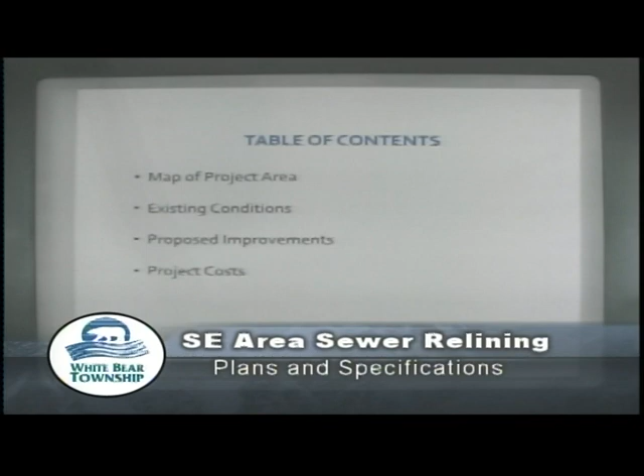We did receive a lot of good positive feedback about the activities that we are proposing to do. We completed that feasibility report, brought that back to the town board, and they accepted that. That's where we are at the next step here, where we're holding the public hearing.

For the project that will improve those old sanitary sewer lines that we have out in this area. So just kind of going through the areas that we'll be talking about, we'll go through the project area, the existing conditions of the system, what the actual improvements are to the sanitary sewer, and then the costs associated with that.

But just as a visual for the project, we have Bellaire Avenue running along the west portion. We have White Bear Lake, we have the township limits, and County Road F cuts right through the middle of it, with half the project being north and half being on the south side. This is all White Bear Township properties out here.

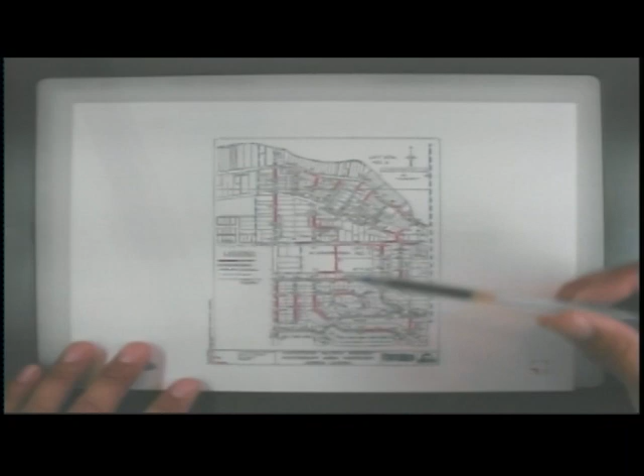The colored areas on the map show the existing sanitary sewer pipes that we have out there. The pipe sizes for the main line are both 8-inch vitrified clay pipe and 10-inch.

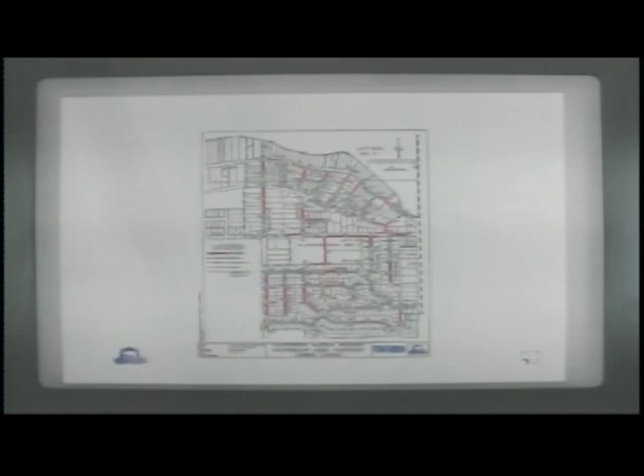So these are old sections of pipe that were installed, which was the common practice back about 50 years ago. They are short length pipe, about 3 feet long. They have held up very well, but we have gotten to a point where, as public works, as we go through and do our annual cleaning areas, we find more and more cracked pipes.

More and more areas that are starting to fail. Just in the last several months, a year or so, we've had a couple of emergency corrections.

I think some of you probably have witnessed them along Bellaire Avenue, where the pipes actually failed. We had to call a contractor out, dig down to correct those pipes because it stopped the flow through the pipes, and fix that. When you are reacting to those situations, that's a very costly process, not a very efficient way to correct the pipe.

And we'll show you just what some of those issues have been. So this is just looking down through a camera that we have run through the sanitary sewer main line. And again, this is where the main line typically runs down the middle of the right-of-way, down the middle of the street for the most part.

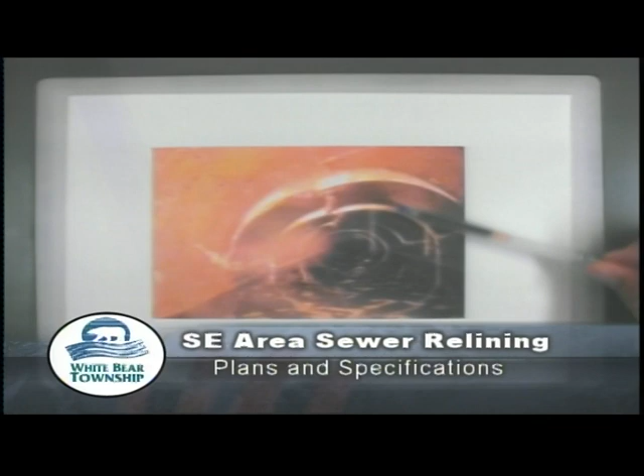What you can see through this camera here is the water line. This is flowing just below half full, but you can start to see here where the separations with the joints from the pipe, and you start getting roots, other growth that is coming in that pipe. I have some more pictures of this.

Here you can see with a time of lower flow, the water is down at this portion. You also start getting buildup in those joints, and here's a significant one.

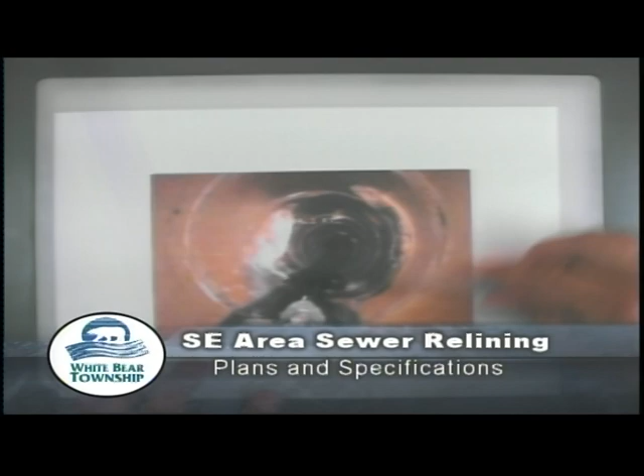So when the township is out doing their inspections, we do televising at intervals, we do flushing of the system, but at a certain point, the flushing activity where we run water through there to flush the pipe out, it can only do so much, and areas like this have to have further equipment work. We've had it where once we get certain buildups, we have to hire contractors to go down and they actually grind out these activities that are building up in the system.

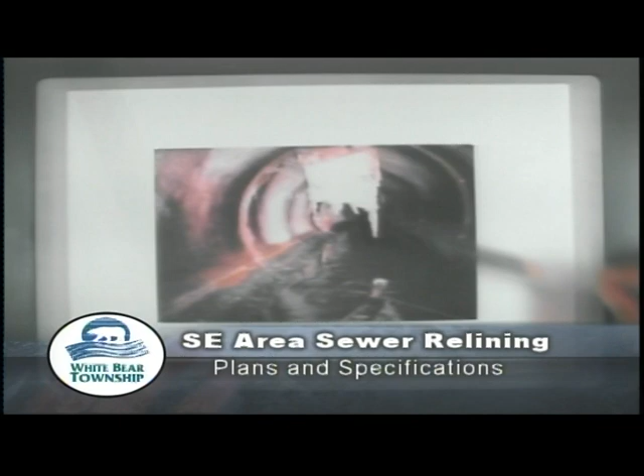Here is another picture showing a significant area, how it's coming down from the top of the pipe. And as the flows build up in the pipe, these become restrictions, and it also becomes where other material in the pipes starts to hang up.

We also have this where the buildup occurs at the bottom of the pipe. If the joints have gaps or other debris starts to build up there, you can see how it blocks the water flow. So all of these items cause issues.

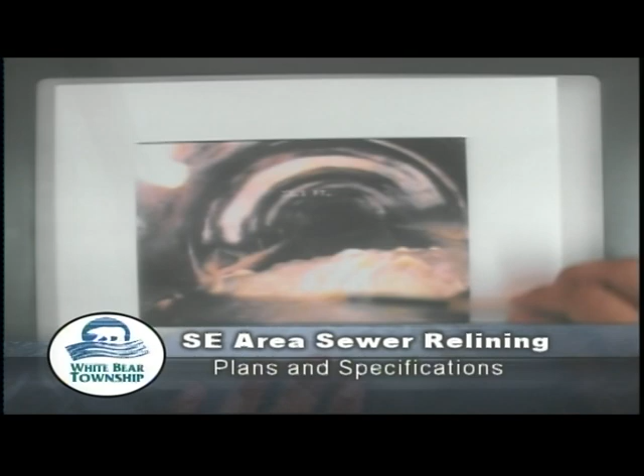As long as we can keep the flow going, you don't notice it at your homes, but these are the type of activities that can increase over a short period of time, cause a substantial backup, and then as the pipe is plugged, that water backs up, and that is where it can back up the services and up into your homes.

Also, if you have a pipe failure, as we had the last couple of years here, it completely shuts off the pipe, and then you just have a short period of time to correct that because you only have so much storage in that pipe.

Overall, the pipe has served its life. We have poor conditions that exist out there, and now it's time that we need to replace this or improve this, or we're going to continue to have problems, and it's going to be an expensive process fixing piece after piece. It's also a red alarm type of situation where you have to get out and fix it now.

Also, our annual maintenance - we want to be able to go out and flush the lines, and the small amount of buildup you can take care of. But as the issue worsens in these pipes, the amount of labor it takes just to do the normal routine cleaning expands in time. So it becomes a costly process to the township.

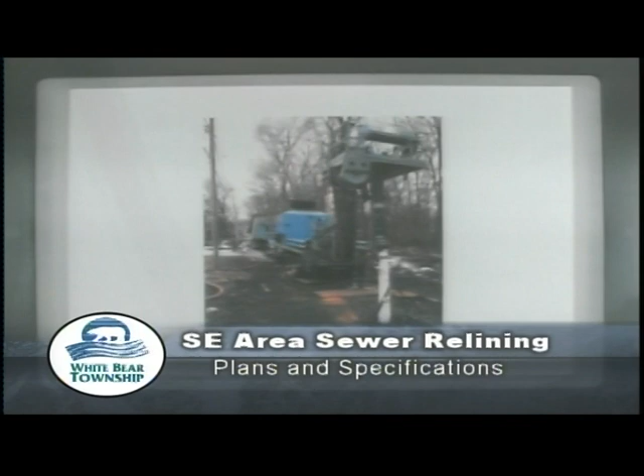As you can see here, the sanitary sewer system is made up of the main line of pipe and then your services to your homes. What we have for access to that main line is, every up to 400 feet is our standard distance, or as you go around bends in the roads or bends for the service area, we put in what you call a manhole - a 4-foot diameter structure that is a vertical shaft down to that sanitary pipe.

But I might try to change the focus a little bit to make it easier to see. Zoom in. So you can play with that to make it a little easier.

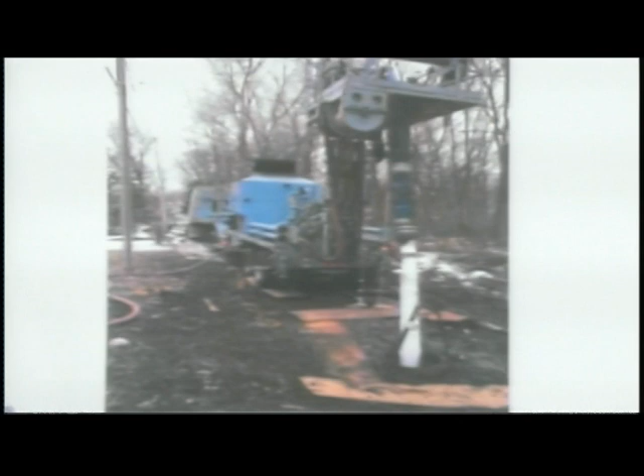All right, thanks. And so what you see here is the manhole structure - basically a 4-foot access down to that pipe that runs horizontally. The system, one other component, is a gravity flow system, so that's what we're using - Mother Nature is what's sending the water downstream.

What we're doing here, through this lining process, is we are able to take, say if we have 400 feet between these manholes, we're taking this 400-foot long sock and we're forcing it through that whole length of pipe.

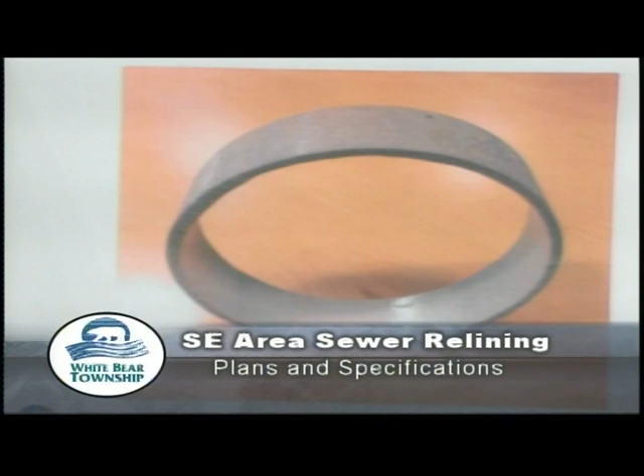So now, I'll show you - go to here. This is a sock that we are running, a continuous sock, the whole length from manhole to manhole. So it's flexible when it goes in. Once we have it to both ends, then we heat it up and cure it, and now this becomes a rigid structure, a hard, round membrane that is inside of that pipe.

Very little of the pipe diameter is used up with this - you can see how thin this is. So you start off by running this down through the whole length, and you end up with this product going from manhole to manhole. So now what was something full of cracks or joints or different issues, we have one continuous flowing system once again.

And unless we had to dig up for some major issue, you won't even see any construction between those activities. When this process is done, you can see there will be large equipment sitting out in the roadways accessing these manholes, but that whole 400-foot length, there won't be any disruption.

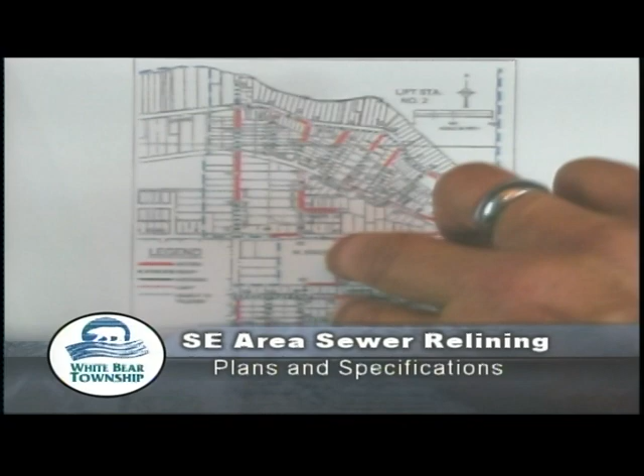Overall, to do almost 30,000 feet of pipe, if you use 600, 700, 800 feet a day, we're talking 40 to 50 days of work. But your impact is really just going to be when they're in the street that you're by. One day they'll be doing work on this stretch, the next day they'll be moving throughout the area. So really, you probably will only see a couple days throughout the whole process of activity.

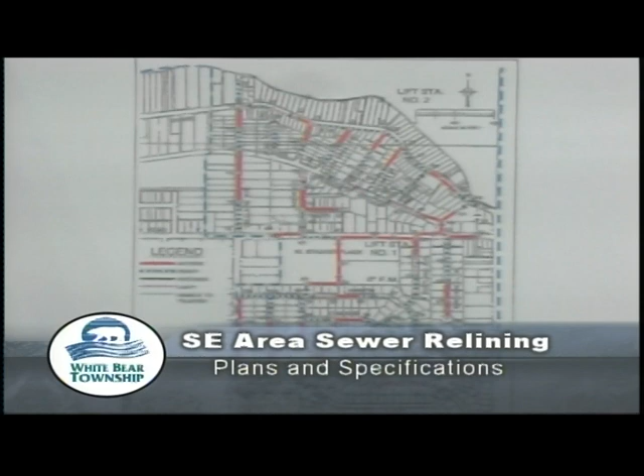You'll see up front when the contractor comes out to do the televising of the system, to really get the details of the pipe and what work we'll have to do, and get all the service dimensions to where everybody's houses are connected. There'll be some manhole work, and some areas where we'll have to dig up the street to fix the pipe, but the vast majority of the activity will be that piece of equipment moving from street to street doing the actual lining activity. So even though this is a lot of days of activity, your inconvenience will be a very short period of that.

So now we get into, what does 29,000 feet of pipe cost? We are looking at a $1,713,000 project. That is the entire process of putting together the plans and specs, going through construction. We have the assessments for this activity, the township costs associated with that, which will be broken down further.

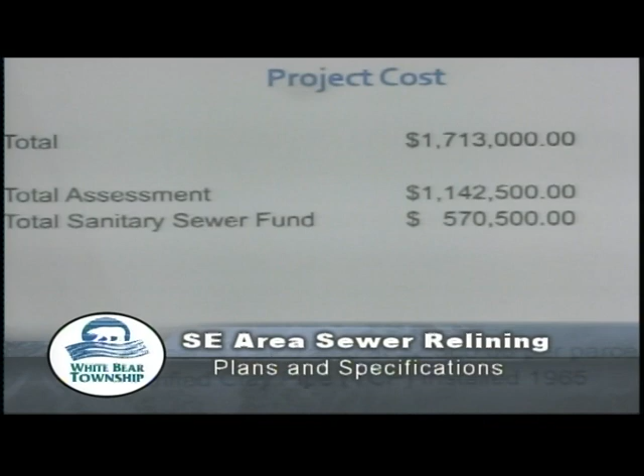We just did some lining work on the south side of White Bear Lake a couple years ago. I'm not sure if you've seen that activity or not. And again, just as a side note, all this pipe in this area was put together in 1965.

So here's another breakdown. Again, residentials are everybody based on 1 unit per parcel per house, that's the $2,500. So that's how we come up with the $1,130,000 of that assessment. We also have the commercial lots: the Bel Air Auto, the Bel Air School, the dental clinic.

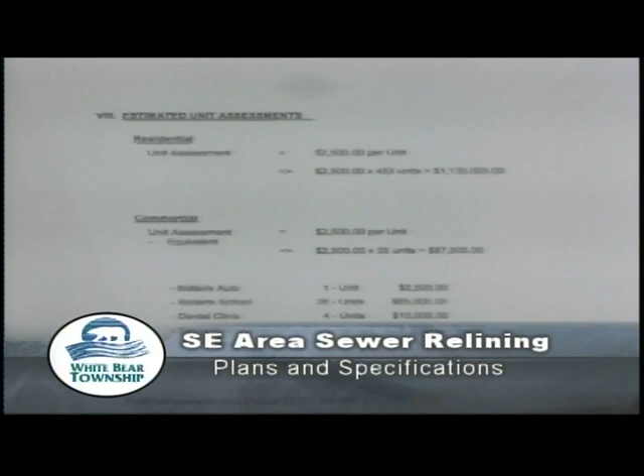The South Shore Trinity Church, and the storage building. Based on the size of those and what we call residential equivalent units, they get the same $2,500 per unit rate, but they are rated per what they would be equivalent to a residential unit. So this Bel Air Auto is equal to 1 residential unit, but the Bel Air School, through all their uses, is actually basically 26 times what a residential unit would use, and therefore their assessment is based on that. Same thing with the dental clinic, the church, and the storage building.

So this project, if it were to go forward, the time frame would be to go through plans and specifications. We prepare those, we go out for bids, have contractors give us numbers. Hopefully by the end of the year, either in December or January, we would be awarding a contract to a contractor. They will have basically the majority of 2017 to do that work. They could be starting in January, February, March, but they would need to be done by the fall. So a year from now, the project would be getting wrapped up.

The time period is set so we can give the contractors enough time to fit this into their schedule and so the township can receive the best prices for that work. Because this is a lining project and we're basically down 10, 12, 15, 20 feet in the ground, this work can be done with cold temperatures in the winter. Our last sewer work along the South Shore, we actually did it when there was ice on the lake, because that became a good access to the tough-to-get-to sanitary sewer that was running along the shoreline.

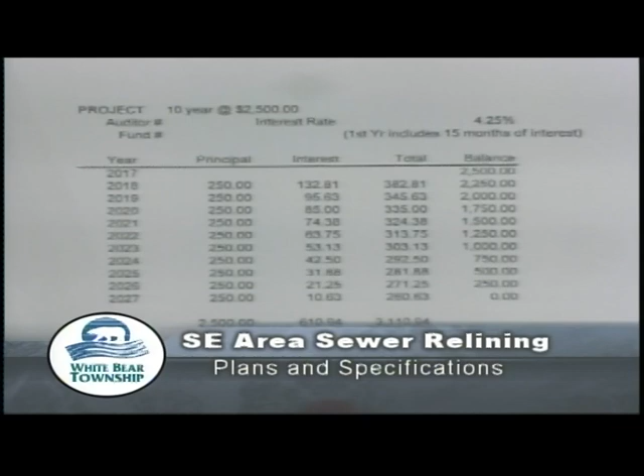At this point, projecting a year from now, we anticipate this on the high side, but whatever that rate becomes, using a 4.25% interest rate, if you took that $2,500 with your principal payments over the 10 years plus interest, you'd be looking at starting up in the high 300s down to almost $250 per year. These would be placed on your property taxes. So if you did that plan, you'd be looking at a final payment 10 years from now, having paid a total of $3,110.94. So the township offers this 10-year payback plan.

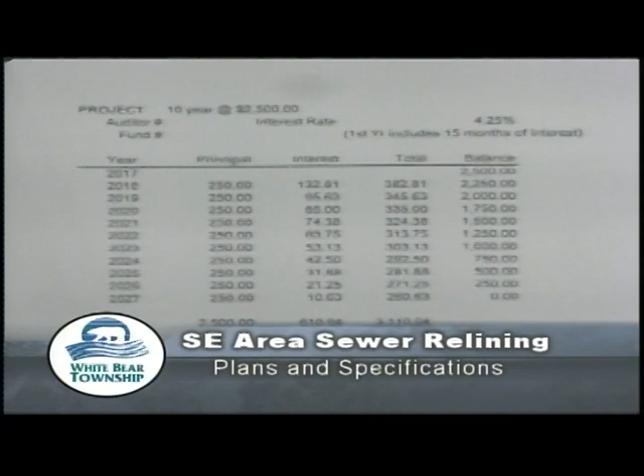If you have other means or other financial possibilities that you want to use, that's fine. Basically, we hold the assessment hearing for all of the parcels. Once that hearing is held, you have 30 days to decide to pay for it on your own, or anything not paid at that point would be placed on your property taxes for the next 10 years.

I think that completes my overall presentation, and I would ask questions of the board at this point before opening up for all comments. I'll ask, initially, does the board have any questions or comments?

We've been reviewing this at our exec meeting for some time now, so I think we're pretty comfortable with it. Jimmy did a nice job. We attended the two public meetings with the neighbors, and I think we had lots of questions asked through those, and we got the answers needed, so I'm comfortable where we're at.

I think you can see, as Ed mentioned, we've been talking about this for quite a few months, so we've been over a lot of the details. But as Jim showed you, there are sections of the system in pretty sad shape, and we've had a few failures out there in recent years too, and that's never pleasant. It's not like the whole system's going to implode next week, but Jim mentioned the system was initially installed with an expected 50-year life, and we've gotten that plus more, so the timing is now to make some decisions.

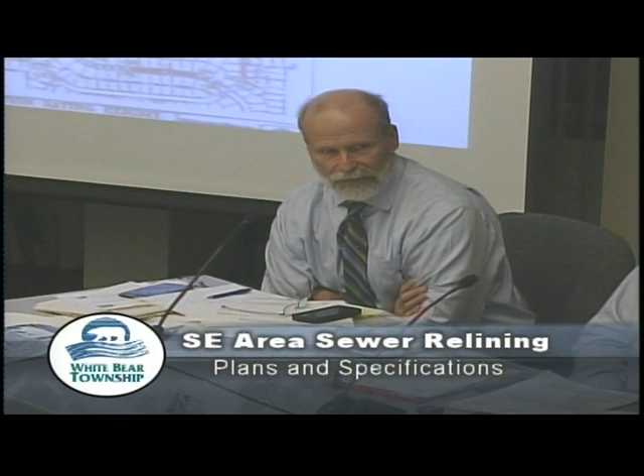Are they? There's a few, and some recently have lined their service lines down there. Okay, and Bill, basically the policy, the historic policy, is the division of responsibility basically stops at the main line.

I think Jim understands, and I think the audience understands that as well. I'm not thrilled with it, but I understand it. That's an argument I have with every municipality. Believe me, it's not the first time we've heard it, and it won't be the last, but it's one of those issues you've got to deal with. That's the policy, I understand that.

I thought it would be worth mentioning that when the town lined the sanitary sewer line for the folks who live on the lake side of South Shore Boulevard, their sanitary sewer ran between the lake and the backs of their homes. That was done a couple years ago. The engineer provided contact information for those property owners to get individual bids from the contractor for lining their sewers, and after looking into it, none of them chose to do it.

So that goes to the point of your description of what you experienced is clear. What we're finding, though, is you might be special. Well, I blame that big old cottonwood tree in my front yard. I had roots this big. It was awful. But it's there now, and it's the biggest tree in the neighborhood.

I'm guessing it's a unique situation. I just hope it doesn't come back to haunt the rest of us. That's basically why I came here, I wanted to say that. Having some insight on this thing, I think it was worth at least bringing up. And I thank you for that. I think it is worth bringing up. Okay, thank you.